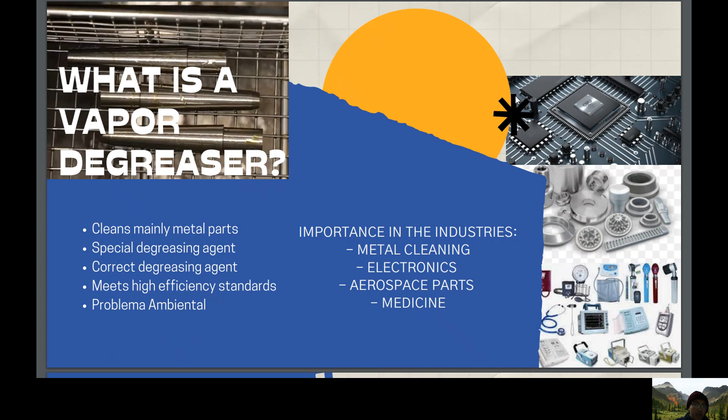The use of this degreaser is of great importance in the metal cleaning, electronics, aerospace, and medical industries, where the cleaning of their accessories is essential for the proper function of their equipment. What is the problem? I have a degreaser. It has a height of 5 meters, diameter of 2 meters, and contains a TCE liquid with a depth of 20 centimeters. I need money and I want my equipment to work at 100%, but I work with a compound that is hazardous to health and pollutant.

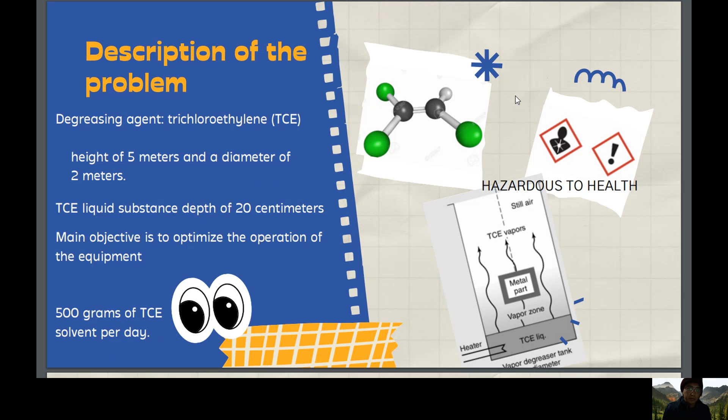Where I am, there is an environmental regulation that only allows emitting to the environment 500 grams of TCE per day. Sounds small, doesn't it? Well, how can I optimize my equipment so that it cleans as many parts as possible and in an efficient way, without crossing the limit established by the regulation.

Let's go with the thesis. The temperature at which the equipment works is highly related to the amount of TCE pollution that is emitted to the environment, as well as to the efficiency of the equipment. So the maximum temperature at which it can work without exceeding the local emission regulation must be calculated. Okay. Bueno, how do we do that?

Here is the mass transfer formula for compound A with the condition that compound B remains static. Where it is recognized as compound A, TCE, and compound B, air, as well as C represents the vapor phase concentration in the equipment. DAB is the diffusivity of TCE in air. L is the height difference between the depth of the liquid substance and the height of the equipment. Finally, yA0 is the vapor fraction of TCE in the equipment.

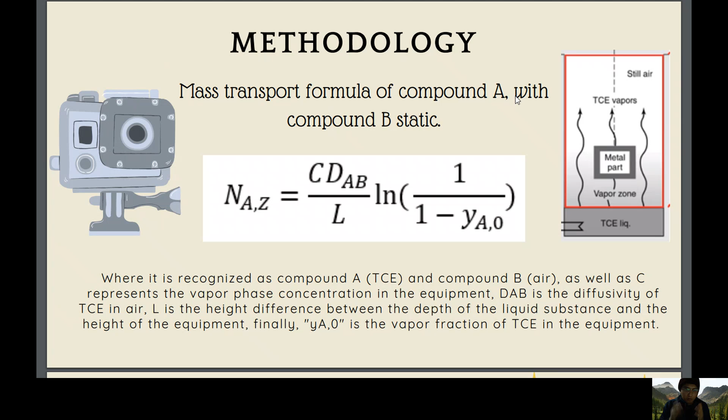To solve this problem, I will divide it into 4 steps. Step 1. Calculate the concentration of the steam. This variable is calculated with the formula of the ideal gas, and knowing that moles over volume is equal to the concentration, we can make a series of simple clearings, and we obtain the equation on the left. The pressure, being an open system, is 1 atmosphere, the ideal gas constant is shown in the slide, and the temperature is estimated and 305 Kelvin was chosen.

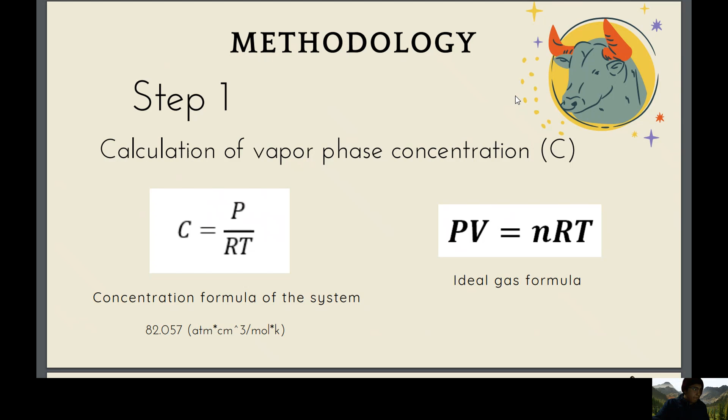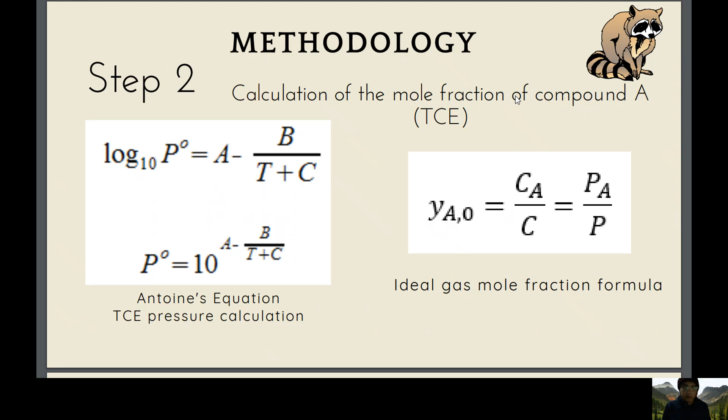Calculation of the TCE pressure, which is calculated with the Antoine equation with data from NIST. Next, the mole fraction of TCE is calculated with the ideal gas equation. Step 3. The longest step, the diffusivity formula for TCE in air is the middle one. Practically, the most complicated part is the calculation of the molecule diameter and mostly the collision integral. These calculations are much better explained in the Excel where they were calculated, link that I leave at the bottom of the slide.

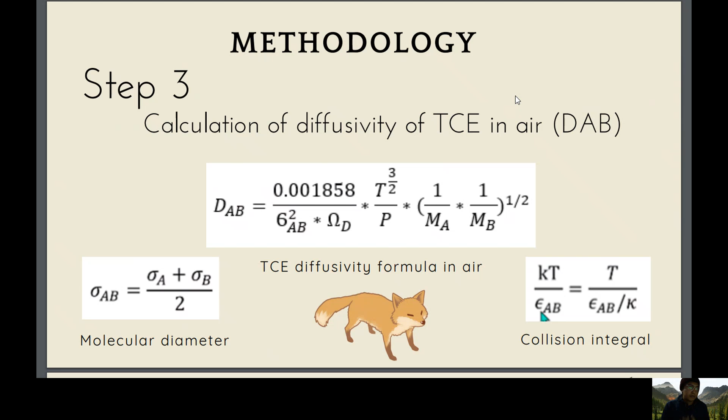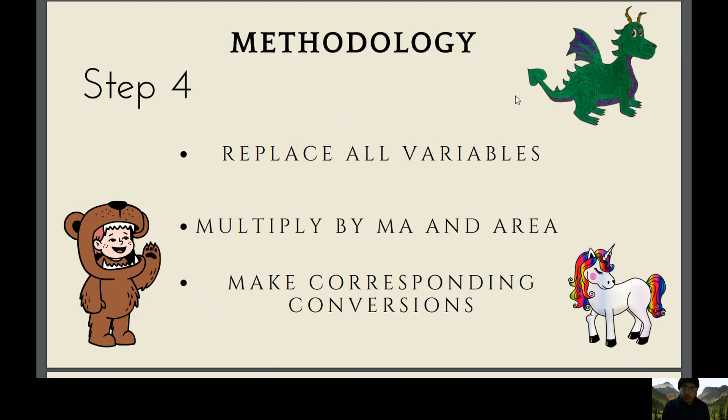Step 4. We already have all the variables to calculate the mass transfer of the TCE to the environment. We only have to substitute the values obtained. Be careful with the units. We multiply by its molecular weight and the area in which we are working. Finally, the units will be grams over seconds. We only convert the seconds to days to compare the amount that is emitted with the amount that is allowed.

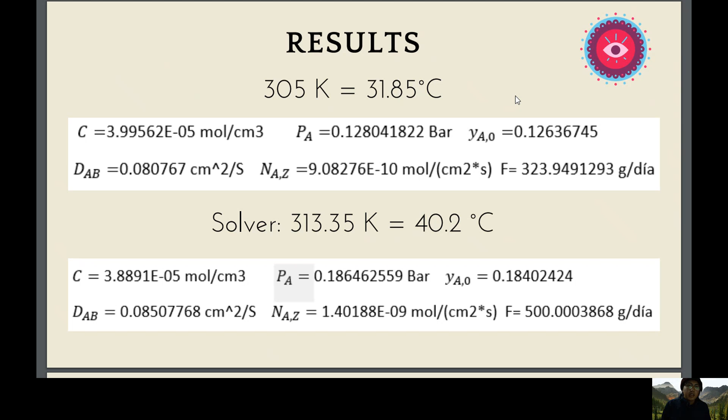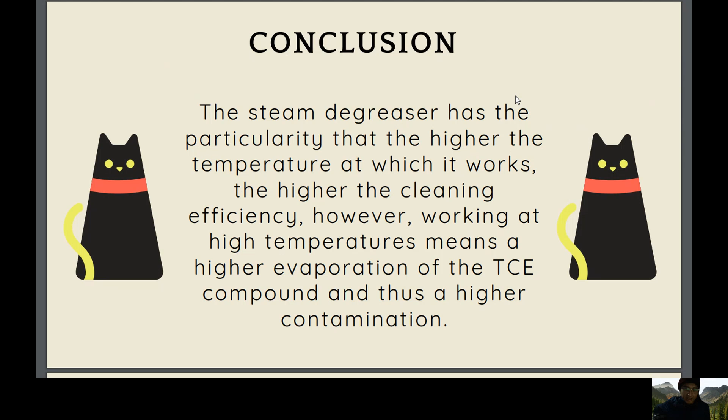In conclusion, thanks to the calculation of the maximum temperature, it was possible to reach an efficient optimization of the equipment. It was also discovered that the equipment has the particularity that the higher the temperature at which it works, the higher the cleaning efficiency. However, working at high temperatures means a higher evaporation of the TCE compound and thus a higher contamination. That is why it is important to have the temperature measured and controlled in any type of distillation process, such as a steam degreaser.